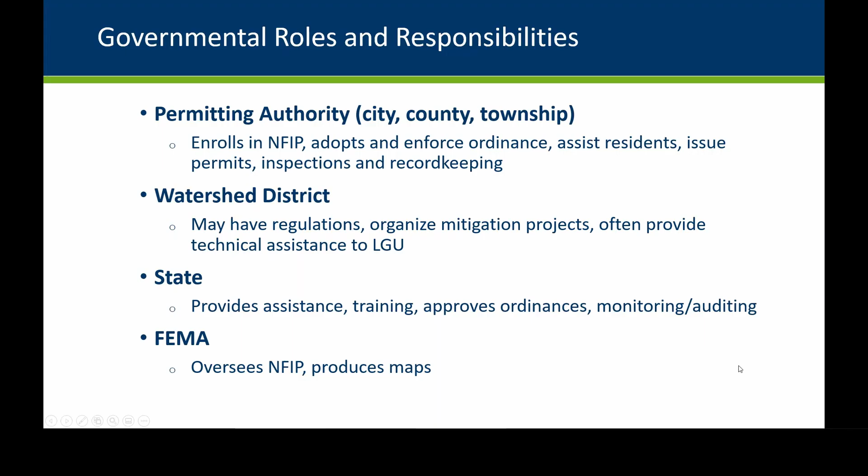Now, what types of development require a permit? Development is what requires a permit. Development is defined in your ordinance, and it's defined broadly. It's structures, it's earth moving, fences, roadways, culverts, bridges—really anything that's moving dirt in the floodplain, by and large.

I also put on there additions as well as restorations and repairs. These are kind of different because they involve alterations to existing non-conforming structures. Additions are limited in floodplain areas. Non-conforming structures are allowed to expand. There's limitations on that expansion, and the rationale behind that is we want to limit exposure to risk within our floodplain areas.

Damages as well. When a flood event comes through, there's a huge permitting demand on that local zoning administrator.

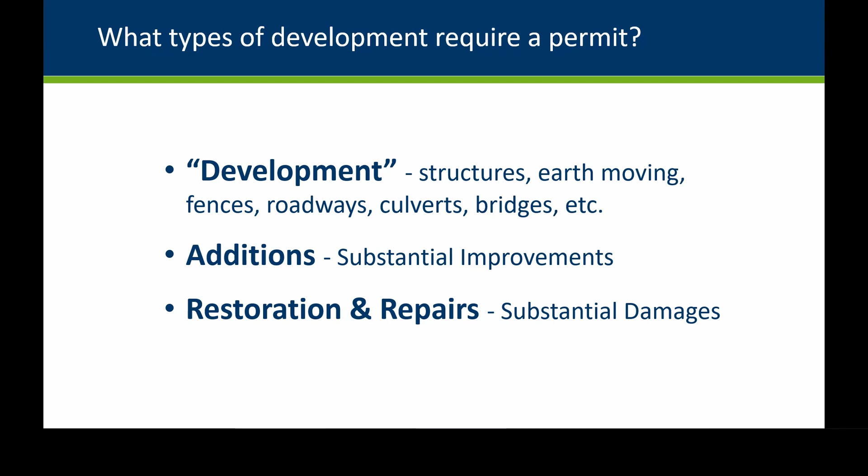When a structure is considered substantially damaged, that's when the damage exceeds 50% of the structure's value, and the property owner is required to bring that structure into compliance. There's a standard evaluation methodology we recommend zoning administrators use during that post-disaster period to determine that 50% category. Those last two bullets are a big part of permitting, which is why I'm including them here.

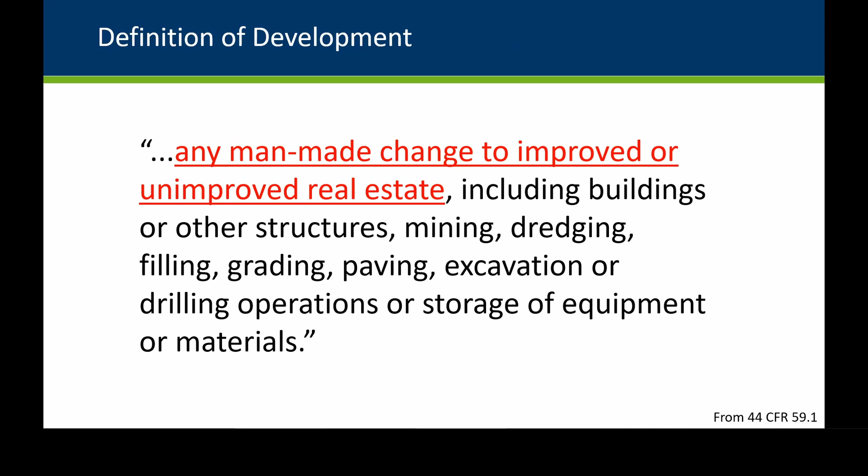Back to that definition of development, here's a portion of that definition on the screen now. As I said, it's defined very broadly as any man-made change to improved or unimproved real estate, including buildings, structures, mining, dredging, filling, grading, paving, excavation, drilling operations, or storage of equipment or materials. It's very all-encompassing - dirt moving, bridges, culverts, roads, shoreline stabilization. These are all types of development, and they all require a permit and at least some level of analysis.

What type of permit is required? You might have a building permit, and you can roll the applicable floodplain regulations into your normal building permit process. You might have a separate land alterations permit if the person is just moving dirt. You might choose to adopt a specific floodplain permit, so when development is in the floodplain, that triggers a floodplain permit. Really, we don't care what type of permit it is - it just requires a permit.

Our typical development happens near water. When a project is solely or partially below the ordinary high water level, that falls under the DNR's jurisdiction, so a DNR permit would typically be required - like for a culvert or a bridge. However, if a significant portion of that same project is above the ordinary high water level, a local permit would also be required, because it might trigger evaluation of other parts of your floodplain ordinance, or sections of your shoreland ordinance or other ordinances you may have as well.

A lot of the activities that require a permit might seem insignificant and wouldn't otherwise trigger a permit for you. That's okay - you don't want to make it too burdensome where it's too big of a deal to obtain that permit. When you're talking about fee schedules, maybe that's an annual thing for your community, and maybe it's appropriate to consider waiving fees for development that wouldn't otherwise require a permit.

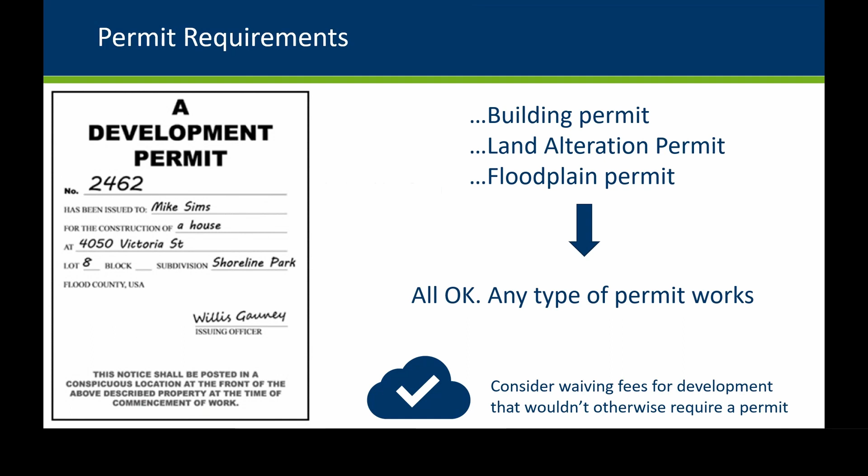On our website, we have a sample permit application form, and there are two versions of this form: a full version, which is a 5-pager, and a simplified version when development does not involve a structure, which is a 3-pager. It details the relevant standards you'd typically be confronting in a floodplain development. If you follow this document, it'll ensure you're hitting 80 or 90% of the items you need to be looking at for processing a permit. I'll get more into this document later in the presentation.

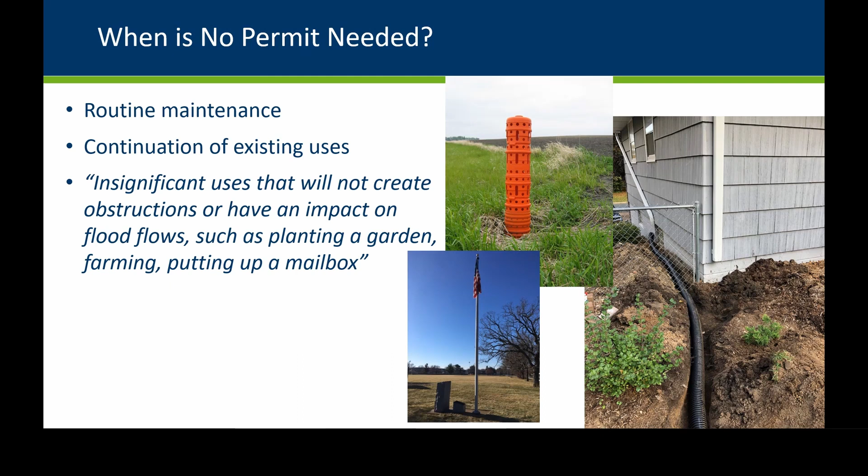When is no permit needed? This has been further clarified in the newest model ordinance we've put out. It talks about routine maintenance and continuation of existing uses that had gotten a permit a while ago. FEMA also details when a permit isn't needed, talking about insignificant uses that won't create obstructions or impact flood flows, such as planting a garden, farming, or putting up a mailbox. So it kind of leaves it up to the zoning administrator what you're going to consider an insignificant use, but it offers those examples. When in doubt, it should be permitted, to ensure that any activities with the potential to impact the floodplain are being permitted.

Here's another example of when a permit might not be needed. Our ordinances detail provisions for RVs. Travel-ready RVs can be stored in the floodplain as long as they're on wheels, highway ready, with those quick disconnects. But it's also something we want to keep an eye on, monitoring in that floodplain. Monitoring is part of zoning administration in the floodplain, and RVs have a tendency to establish permanence - those wheels can sometimes disappear, and folks can have attached decks like what we see in this picture. So it's something to watch in floodplain areas, because when these do get flooded, they have a tendency to get destroyed completely. These are people's homes, and we want to ensure they're dry.

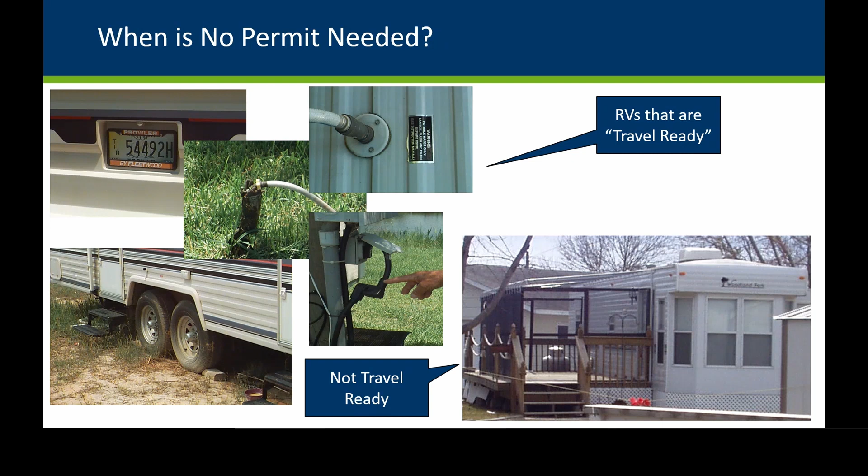A typical building permit process.

The structure of this presentation: we're going to guide us through a typical permitting process, and we're going to use a building as an example. A typical process is, a person would come into our office and they would want to develop a property, and we want to guide them through the process.

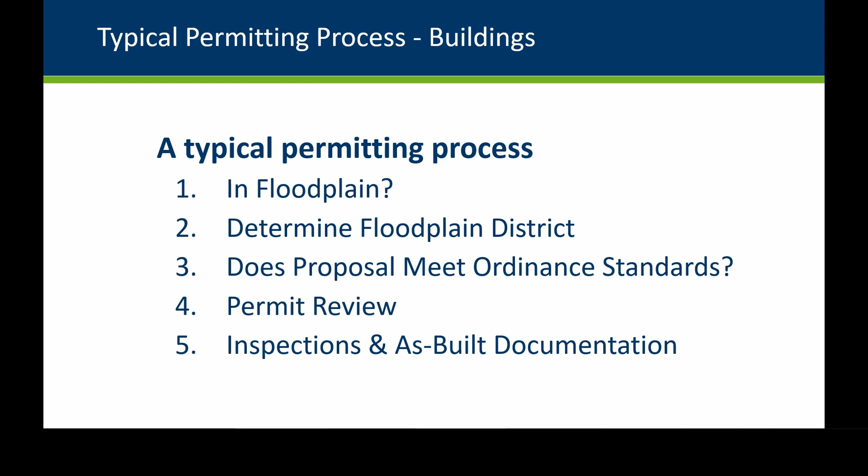Are they in the floodplain? Once we determine that they're in the floodplain, we want to verify what floodplain district they're in. We want to dig into our ordinance and ensure that the project's meeting ordinance standards. And then we work through the permit application process. We review that permit and we issue that permit, and our work isn't done there. Floodplain also involves inspections, and it requires documentation. So we're going to dig into each of these 5 steps in greater detail as we go along.

Like I said, so are they in the floodplain? A resident has come into City Hall and they've inquired about building down by the lake or the river. Our first step is just to figure out where it is and whether our floodplain ordinance applies. So we need to know our maps and how to find them. And this is going to be different in every community.

The site here, our Find Flood Map site, contains a few different tutorials for viewing and downloading maps. On this page, you can click on that expandable map. It gets a little bigger. You can see the different types of flood maps in each county. Some counties and communities were mapped in the early parts of the National Flood Insurance Program in the 70s, 80s, and even 90s.

A lot of those maps were done, I don't want to say crudely, but they were printed on paper. You don't see them over an aerial photo background. You have to get out your ruler and scale it out. Contrast that to flood maps that are done more recently. They're done digitally. You can access them online through FEMA's Map Service Center site. You can see it over an aerial photo background. The floodplains clearly follow contour lines, and they're just a little bit more accurate.

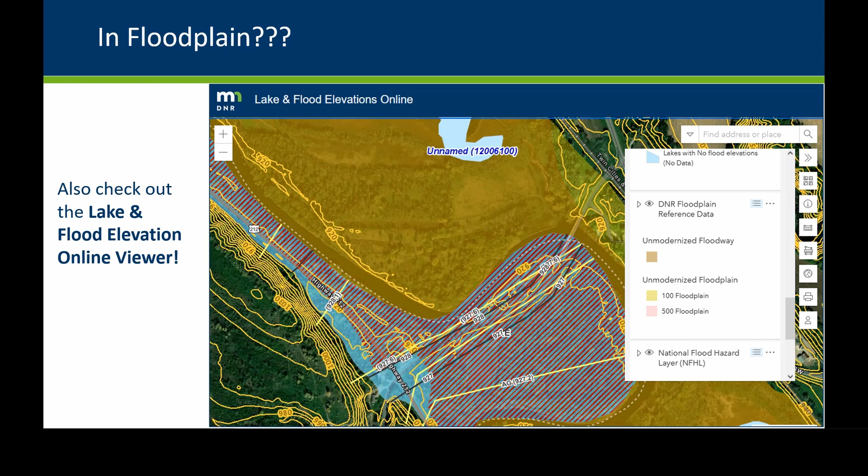There might be a couple of counties where it's not digitized, but at one point we've taken those old paper maps and digitized them so you can view them over an aerial photo background. And that's what's so great about this Lake and Flood Elevations Online, is that it brings all of those different sources together. If I was giving this presentation just like 3 years ago before this came out, I would have been talking about the different places you can go to find all of these different things. And I think it was kind of confusing to a lot of folks. Long story short, if you haven't familiarized yourself with this site, I would encourage you to do so.

So now that we've found our map, we want to evaluate its accuracy. And there's a lot of situations where the floodplain is mapped poorly. It might be an A zone that was mapped without any kind of detailed modeling, like A zones have a tendency to be, or it was mapped before we had LiDAR flown, so before we had an accurate representation of those contour lines. Lots of times the maps, when they were originally delineated, used 10-foot USGS contour maps, so it was very difficult to get very good delineations using those old 10-foot contours. And that was the best data we had. You should make a point to learn your maps and compare them to the contour elevations well enough to know whether your floodplain boundaries accurately align with those true ground contours.

So a couple of examples here. We see on our screen this mapped floodplain, which clearly doesn't follow contours. And we have a property owner that wants to develop in this site right here. It's outside the floodplain, but you can clearly see that it's low. If this was mapped today, this probably would have been mapped in. It's obviously an at-risk site. Alternatively, we have this site here, which is on a ridge, but it's been incorrectly mapped in.

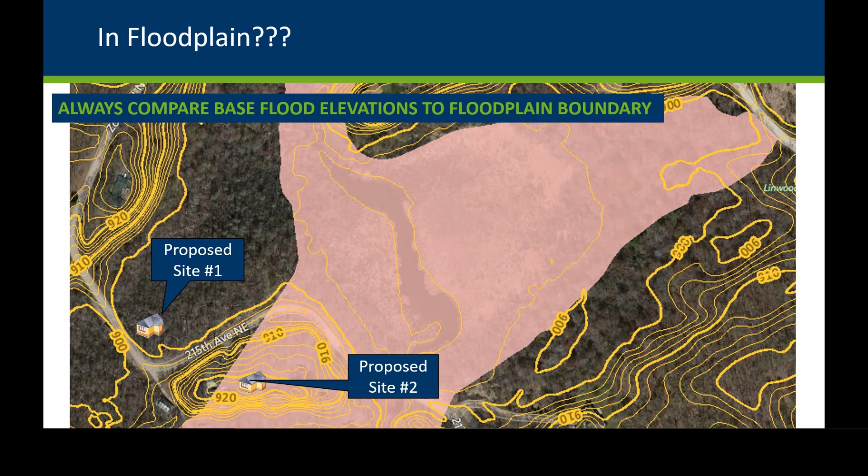And really, both of these sites, we have the ability to apply our floodplain ordinance to them, and we should be. The reason is because we have a rule provision that accommodates this type of poor mapping, and it says where a conflict exists between the floodplain limits illustrated on the official zoning map and the actual field conditions, the flood elevation shall be the governing factor in locating the regulatory floodplain limit. That's been incorporated into our model ordinance for as long as the floodplain management program has been around in Minnesota. So you have a provision like this in your ordinance too. And that gives you the tools to apply your ordinance in those areas that might be just outside the mapped floodplain areas, but which should actually be mapped in.

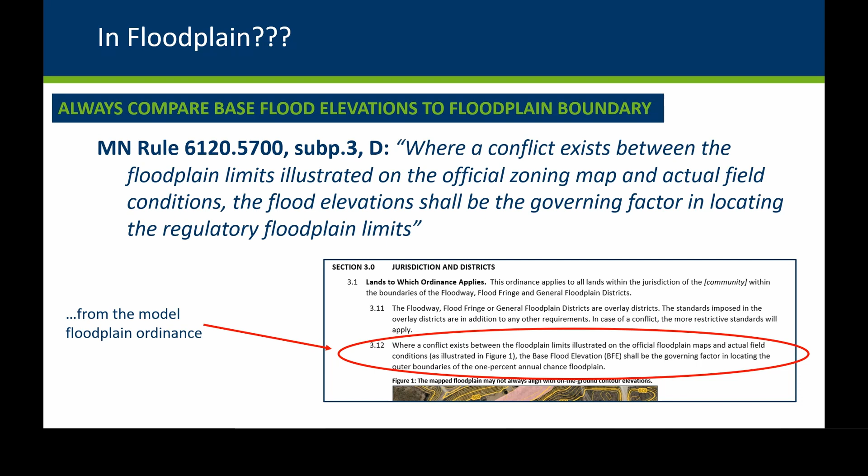So let's do the same type of evaluation on another site. This is another A zone, with no floodway delineated, no flood elevations. We've looked on our official flood map, and this is what it looks like. We don't see a floodway, we don't see flood elevations. There's no contours or nothing. But we get a property owner that wants to build in or next to that A zone. Now, we can't issue a permit until we verify the boundaries of the floodplain, and we must stay out of the floodplain entirely until that's done. And that's a good thing because there's a certain level of unknown risk around these A zone areas.

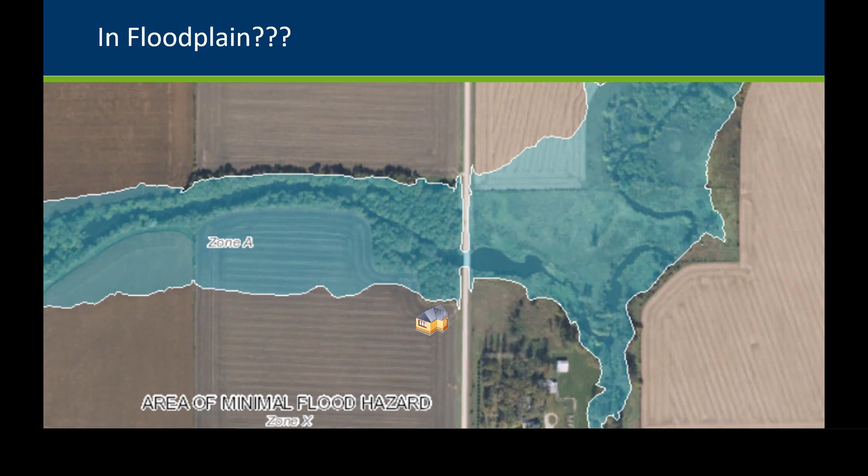So a typical process, if I was a zoning administrator confronting this property owner: number one, are they in the floodplain? To determine that, we need to know the base flood elevations. This happens to be a site where we have our pink line data set. Though we didn't see flood elevations on our official FEMA floodplain map, we can open Lake and Flood Elevations Online and see our pink lines. So here's a site, and we can see that it's between BFE cross sections of 1310.5 and 1310.2. We're going to call our base flood elevation the upstream cross section, 1310.5, and compare that to the contours.

In our location, it's looking like the floodplain pretty closely follows the contours here. So this is a location where the floodplain is delineated pretty accurately. That's a good thing. We're comparing our base flood elevation to the contours. They match up. So they can build outside of what's mapped, and they're outside the floodplain. The floodplain ordinance doesn't apply. If we can convince these property owners to stay outside the floodplain, it's going to be a much simpler permitting process. They're reducing risk. It's a good thing. Everybody's happy. It doesn't always work out that way.

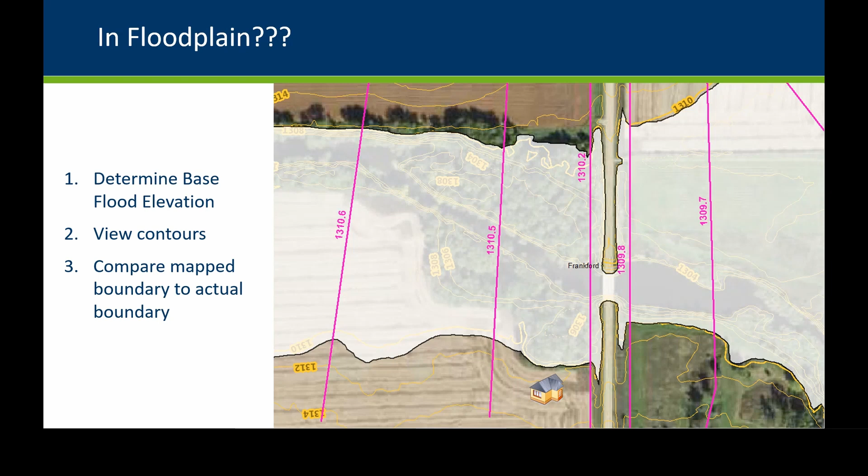Folks like building as close to that water as possible. And in this situation, it might be in the shoreland district. So if we have a shoreland ordinance in our community, that shoreland ordinance, if we look at the image on our right, along rivers and streams, extends 300 feet landward of the ordinary high water level. In this situation, the floodplain is narrower than that 300 feet, so the shoreland might extend outside that mapped floodplain.

Minimum elevations still apply throughout the shoreland area, even when the floodplain is shown to be a little bit narrower. Shoreland minimum elevations apply in unmapped areas entirely, and like I said, in those situations where the floodplain is narrow. So the graphic on the left is kind of a depiction of what we just saw. You might be on the shore side, clearly in the floodplain, and that's representative of the house on the right. Clearly in the floodplain, regulations apply, minimum elevations apply. They have to elevate that lowest floor above the RFPE.

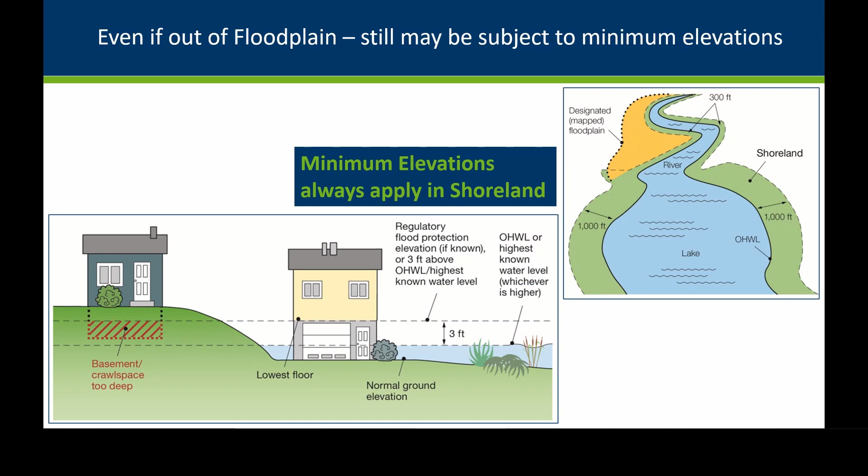The house on the left is outside the floodplain, but still within shoreland. Minimum floor elevations still apply for this house as well. If they want to dig a basement, they can't dig that basement below the RFPE. The great thing about this standard is that when water bodies are mapped by FEMA at some point down the road, this standard ensures that our structures are built high and dry above that 100-year flood elevation. This ensures that our building stock is protected. It eliminates the requirement for residents to carry a flood insurance policy when they're later mapped into the floodplain. This has been a very good and successful standard for Minnesota.

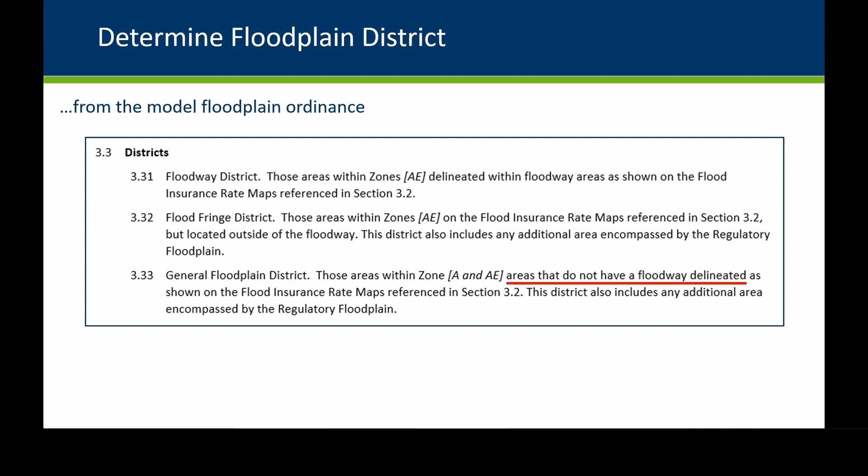So we verified that our site is in the floodplain, and next we have to determine the floodplain district. Your ordinance should be set up in a way where it details these different districts. We have a floodway district, a flood fringe district, and a general floodplain district. If your community has A zones or areas that do not have a floodway delineated, you have a general floodplain district in your ordinance. So we're determining what district our site is in. If we're in a detailed study area where the floodway and flood fringe are clearly delineated on a map, this is typically easy.

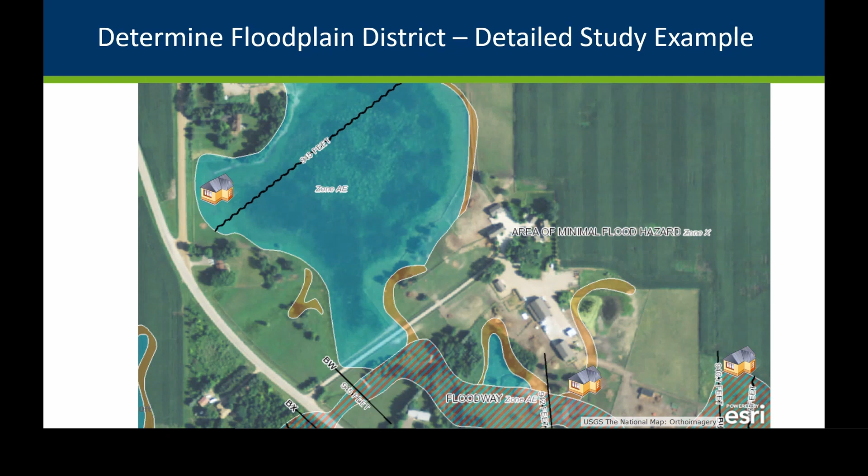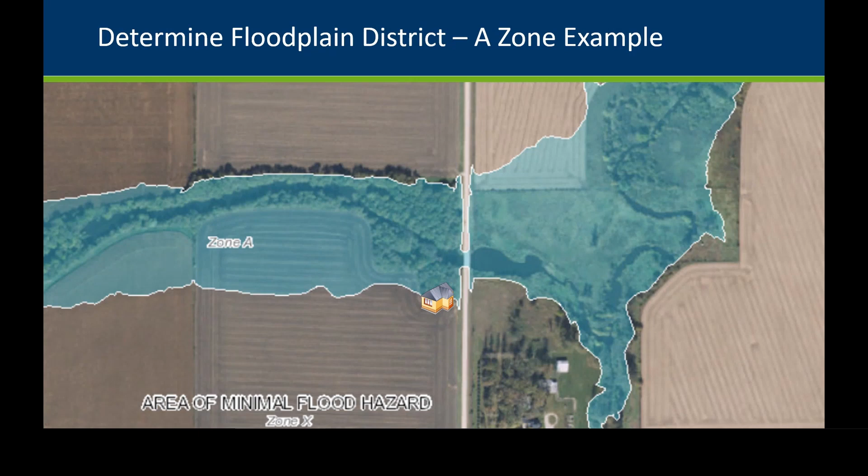Let's do another example. Let's go back to the same site, and let's say the same person doesn't want to stay out of the floodplain, and we can't convince them otherwise. They want to build as close to that stream as possible, and shoreland setback requirements allow them to do just that. Our ordinance allows them to build within the floodplain if this is an A zone, but a process must be followed. Since this is an A zone, the floodway is not delineated. This is within the general floodplain district. In order for them to build there, we have to verify that they are going to be outside of the floodway.

Your ordinance should detail a process for that. In our most recent model ordinance, this is contained in sections 7.2 and 7.3. Those on the call probably have an ordinance that's based off an older version of our model ordinance. This could be clear.

But by and large, what your ordinance says is something very similar to what's on my screen here. And that involves determining an elevation. That is always required when you're in an A zone of some sort. Again, that's not going to be on map service center, but if you're in an area with those pink lines, that might be available through our lake and flood elevations online.

You have to do an encroachment analysis. Since this is an A zone, a no rise requirement doesn't apply. In A zones, you're actually allowed some level of rise, no more than a half a foot, as long as no other flood damages would result.

Increased flood damages, our interpretation of that is you can't cause any rise if it's going to flood out a neighboring house. So though your ordinance allows a half a foot of rise, it's important to look at what other houses around there might be affected by it. So you might be limited further, so that would limit your ability to bring in fill, for instance.

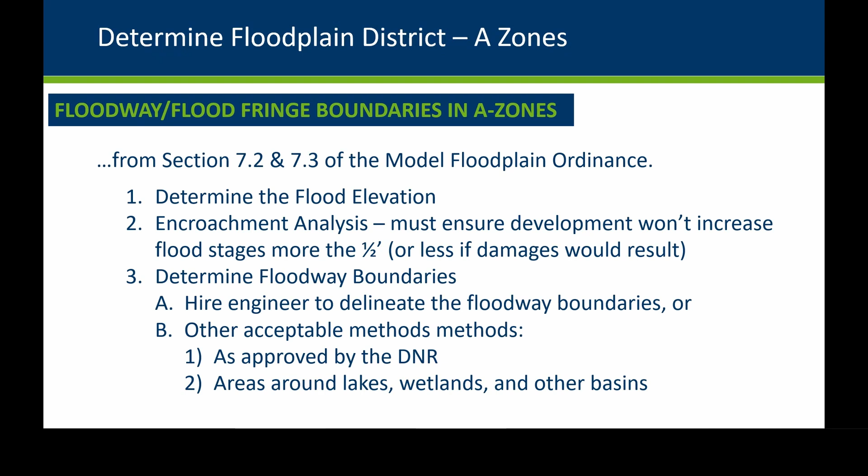Then our rules accommodate for other acceptable methods, and those other acceptable methods have to be approved by the DNR. Some of those are written into an ordinance, which I'll get into. There might be some straightforward scenarios where the DNR can take a look at the hydraulics and simply draw a floodway line for the local community.

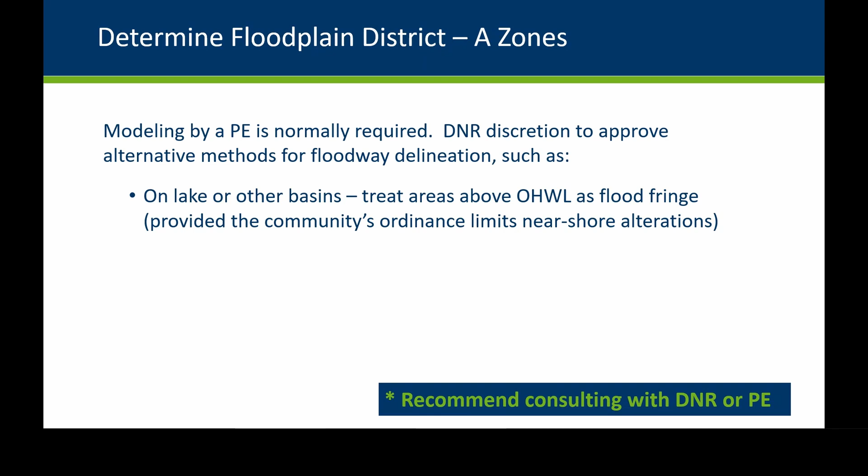Around lakes, we have language that allows all lands above the ordinary high water level to be treated as flood fringe, so long as disturbances in that nearshore area are minimized. Now, if you're right next to an inlet or an outlet, it might require further analysis.

There's also those backwater situations where we don't have velocities and flows. We could draw a floodway line in those situations to clearly show that it's outside the floodway. Situations where it's upstream or downstream of a bridge, the hydraulics in these locations is very predictable and can help guide those floodway boundaries.

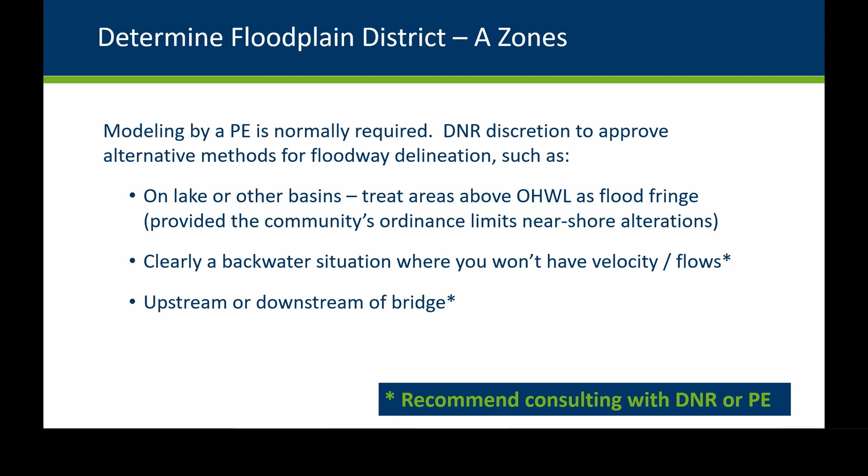I think next Monday, Ceil has a special training on A zones, the 13th. So if you're a community with a lot of A zones, I would encourage you to attend that presentation, and she'll dig more into these concepts at that presentation.

So we verified the sites in the floodplain. We verified what district it's in. Now we need to dig into our ordinance and make sure that it meets our ordinance standards. So our ordinance guides uses. The ordinance will talk about permitted uses and conditional uses. The floodway is very restrictive in the types of uses that are allowed in the floodway.

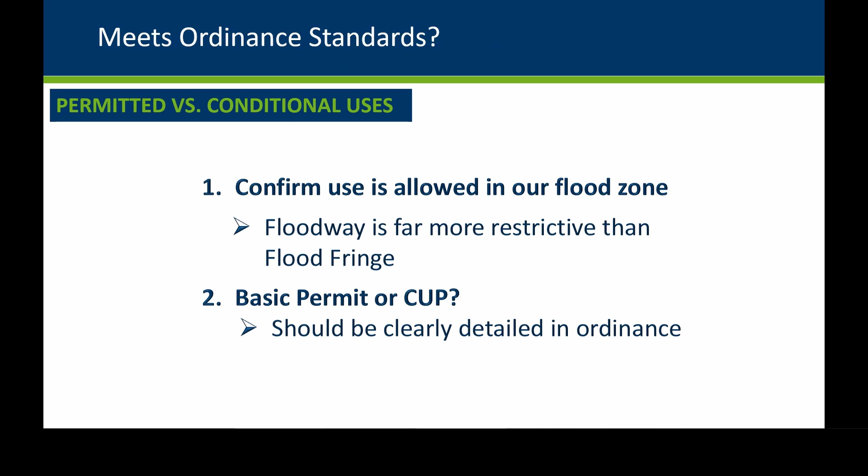If we're in the floodway, only so many things are allowed there. Flood fringe, broadly, anything is allowed, more or less, with some exceptions there. Then once we determine that it's allowed, is it a basic permit or does it require a CUP? And these things are pretty clearly detailed in your ordinance.

There's requirements that apply to all development. All development must be anchored. You must use flood resistant materials. There must be adequate drainage, not detrimental to adjoining areas. You don't want to flood out your neighbors. Utilities must be above or flood proof to the RFPE.

There's also a provision for storage of materials. Nothing that's flammable, explosive, injurious, or likely to cause pollution. That provision, that last bullet's been written slightly different than the most recent version of our model to more closely mirror what's in rule, as well as accommodate for those types of projects that would require PCA permitting. So it accommodates for exceptions provided they meet the requirements established by Pollution Control Agency.

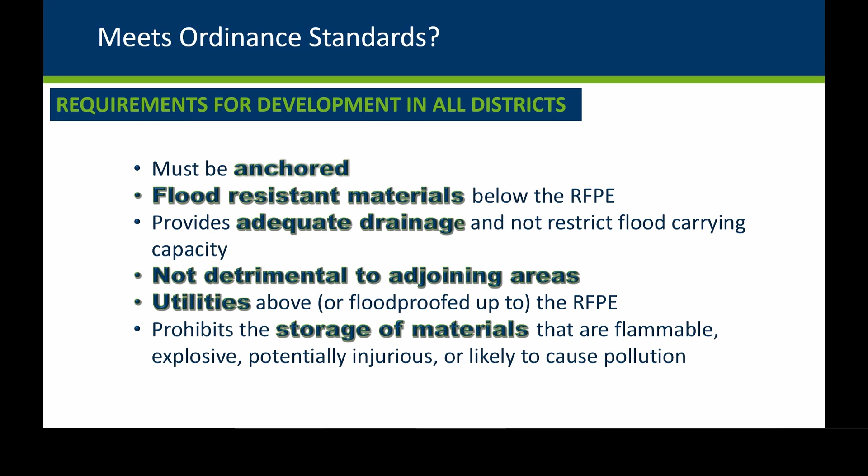But we're building a house. And there's two methods to build a house in the flood fringe. You can elevate on fill, and that's a basic permit. And there's alternatives to fill. Anything that doesn't meet the fill standards requires a CUP.

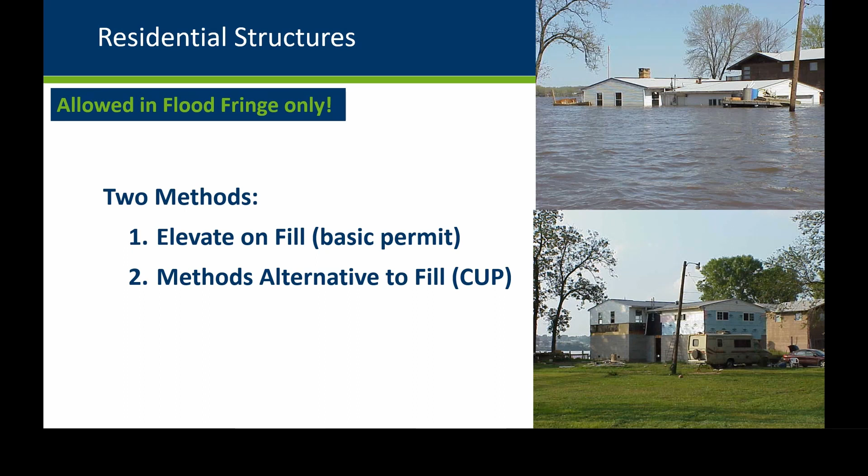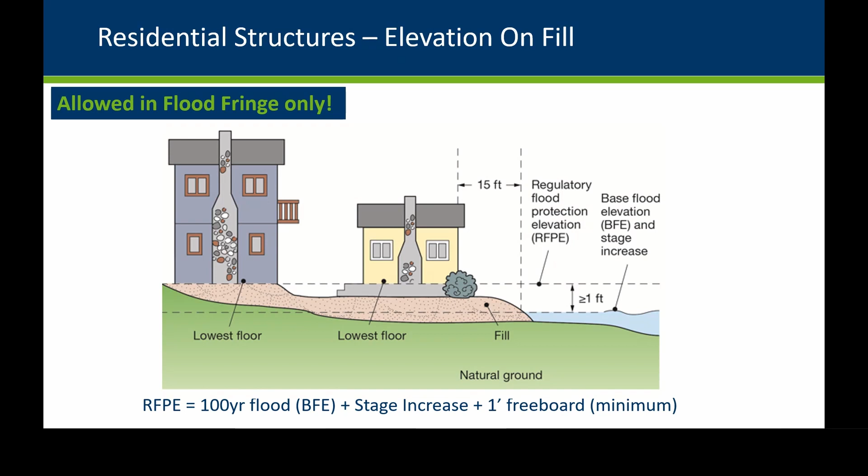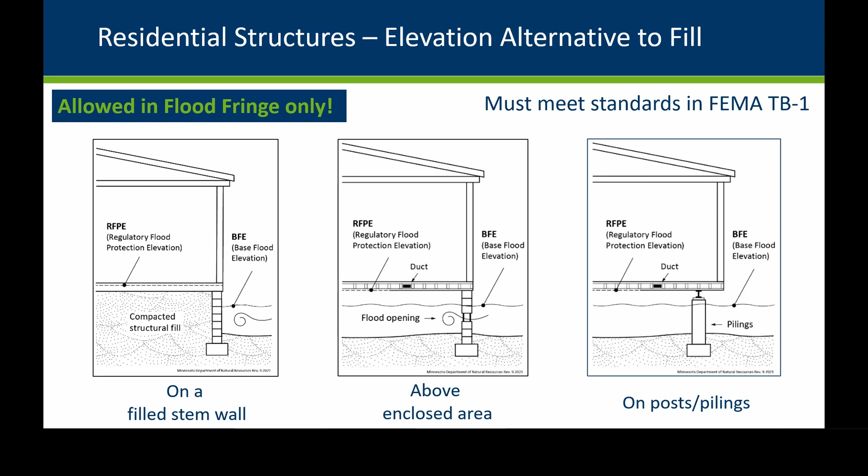Let's like the example I talked about—say you have a narrow lot and you can't extend your fill 15 feet. This is a very reasonable alternative. Or say you have a situation where the natural ground is well below RFPE, and the amount of fill you would need to bring in is extremely cost prohibitive. This might make the options in the center and right side of the screen a little bit more appealing.

Definition of lowest floor, just real quick: the lowest floor is the lowest enclosed area, including basement. Your definition will have a second sentence that relates strictly to those alternative elevation methods, and that creates an exception to that first sentence. It's basically saying if you have flood vents and you're utilizing those alternative building elevations, the lowest floor would not be that lowest enclosed area.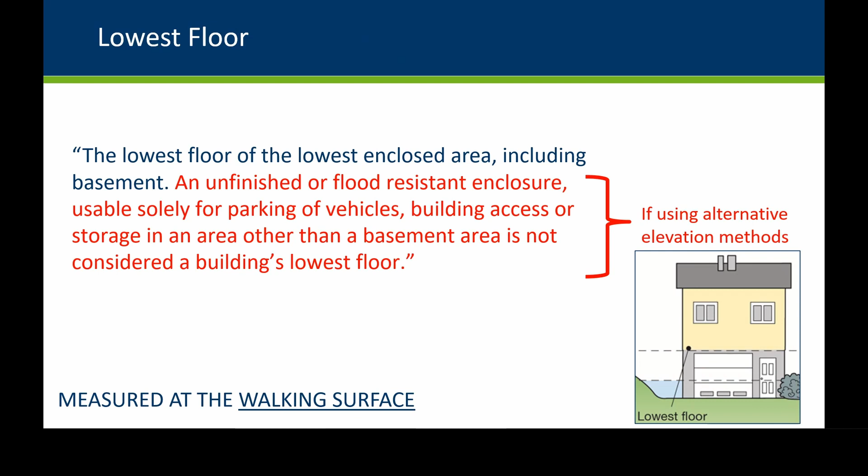So we talked about primary structures. These are accessory structures, and real quick—there's 2 primary methods to develop an accessory structure.

The first, and most common, is through wet flood proofing. That enables the accessory structure to be inundated. You've installed flood vents, and you're accommodating for that structure to be inundated during a flood event. When you build that way, you're only limited to structures that are less than 576 square feet—that's the size of a 2-car garage. Within those areas, they can only be used for parking and storage.

You can build a larger accessory structure on fill, but if you're going to utilize those wet flood proofing methods, the only way to do it would be through a variance—think about a large ag structure, for instance. Using the amount of fill to get a large ag structure above the RFPE might not be possible. So that might be a type of situation where we see a variance allowing wet flood proofing, but for a larger structure. Those would be one of the few situations that we would ever see a variance in floodplain.

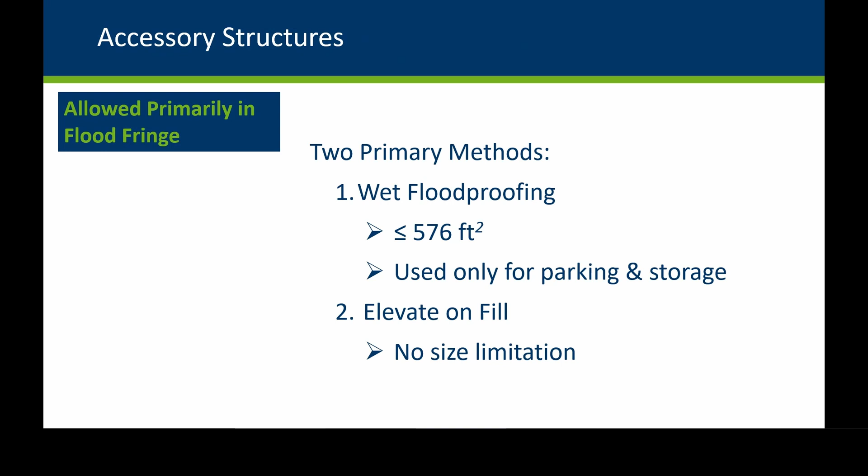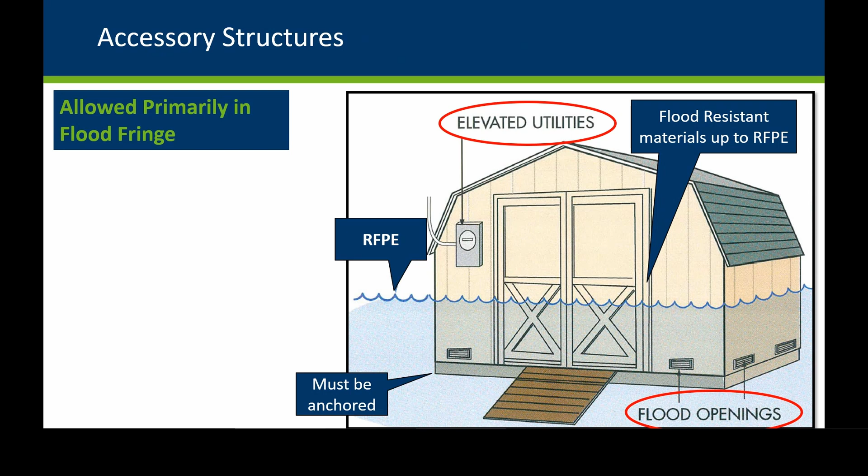Visually, this is a wet flood proofed accessory structure. We can see that we have our flood openings. We have elevated utilities above the RFPE. They meet the standards that apply to every other type of development in the floodplain—it must be anchored, it must have flood resistant materials, that sort of thing.

Accessory structures are challenging for zoning administrators. A lot of these have a tendency to get built without a permit.

There's good reason for that. They have a tendency to get washed away during a flood event or plug up culverts downstream. I understand that these are all over the state, but they're just not permittable.

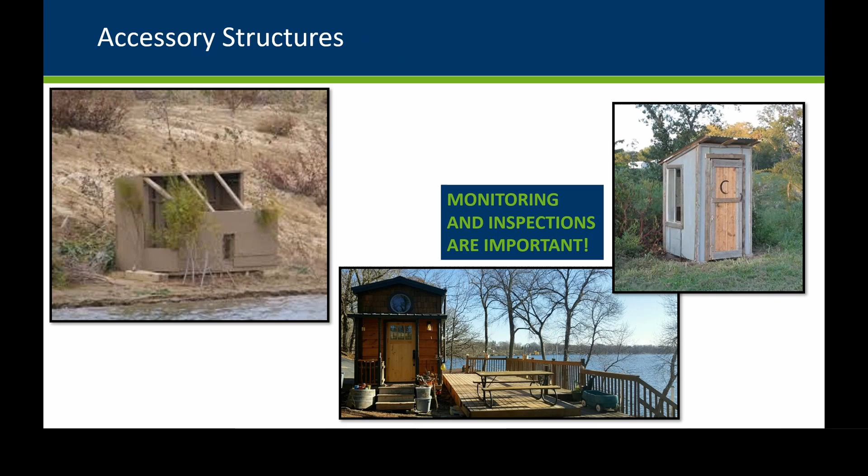On the right, an outhouse. Our floodplain ordinances have standards for sewage treatment systems and other service facilities. We don't want these in floodplain. They're tough, tough to permit. You might not have a permit process for them, but when it's floodplain, they just need to be scrutinized more.

So we've done all of our analysis, and now it's time to issue our permit. This gives us an opportunity to communicate with a property owner. It's important to communicate flood risk and alternatives with the property owner, as well as implications for flood insurance.

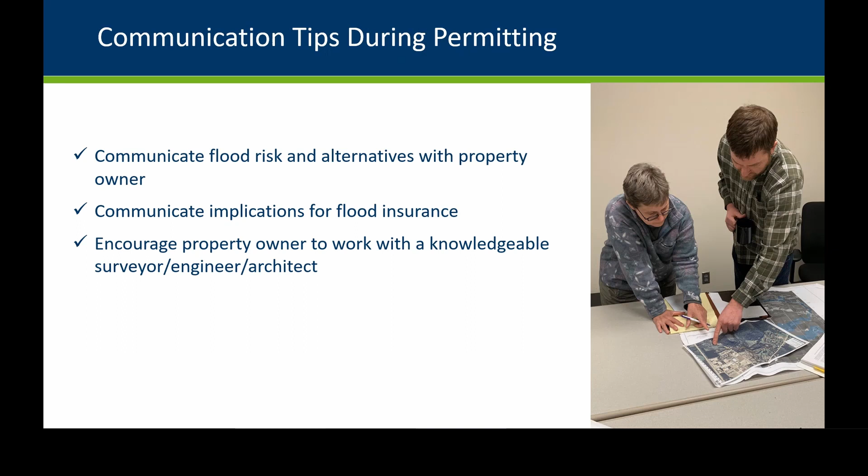This is our chance to steer the property owner to different local contacts, a surveyor, engineer, or architect we might have experience with, that can help guide a property owner through that process. If you're utilizing our floodplain permit application form, you can help complete that permit application form together. This is also where you want to encourage the completion of an elevation certificate, a formal FEMA elevation certificate.

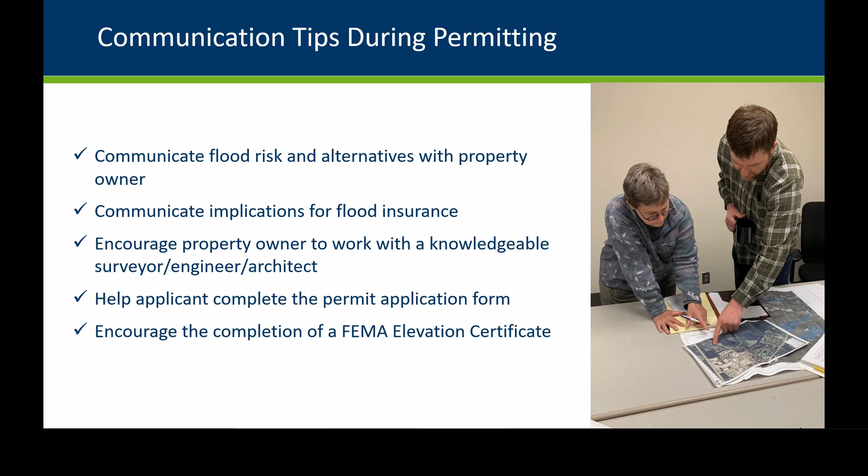There's reasons for that, and I'm going to get into that later. But that's one form of an as-built that we really should start thinking about more and more.

Our permit application form, let's dig into this a little bit. This is, I believe, from the 3rd page of our 5-pager, our full permit application form. The first 2 pages are filled out by the applicant, and then this 3rd page is filled out by the floodplain administrator.

This top section is where we detail our flood zone and our RFPE determination. We verified the district that they're in. Is it a permitted use? Is it a CUP? And then we identify our base flood elevation and our stage increase that we found from the flood insurance study or otherwise.

We identify the freeboard that's in our ordinance to come up with our RFPE, and in this case, it's 1092.3. We've identified the datum that it's in, as well as the source of where we found that BFE.

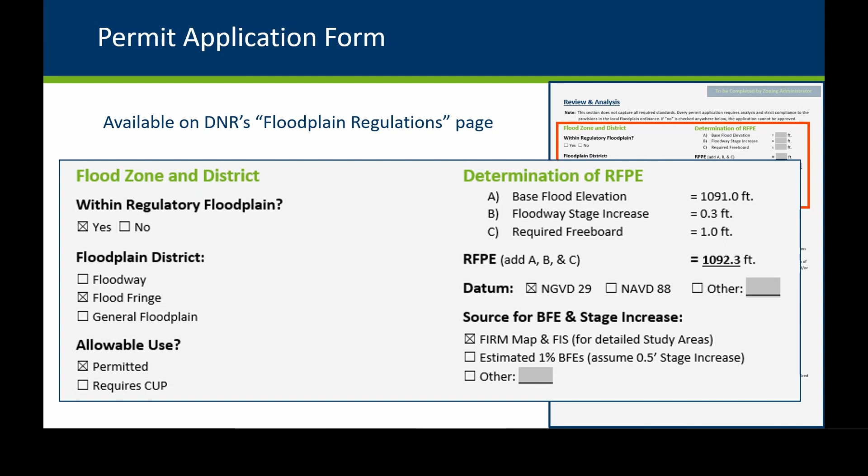The bottom section is for when we have building construction. This is where we're identifying the required elevation for the structure and what is required, such as the top of the bottom floor, including basements or crawl space.

The top of the next highest floor would be applicable if we're utilizing those alternative elevation methods. Elevation of an attached garage, if we have one. We identify the lowest elevation of the electrical, gas, ductwork, lowest adjacent grade, and fill elevation 15 feet from building.

This communicates to the property owner that these elevations are required. When this is complete, the property owner knows exactly what elevations they have to meet, and it's documentation for the file.

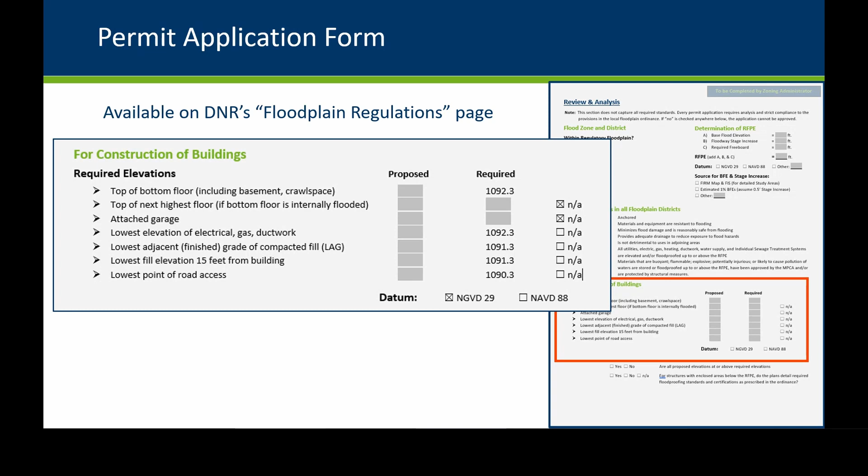I think it's the 4th page that details relevant requirements for non-conforming structures. So if it's an alteration of an existing structure, it requires us to do some evaluations, documenting costs of the improvements or repair. We have to identify a number.

We also compare that number to the market value of the structure, and we have to determine what that market value is. We have a recommended process for doing that, detailed further along in this presentation. But we have to compare the two, cost of the project to market value, and ensure it's less than 50% of the market value. So whether it's an improvement or repair, those costs can't be more than 50% of the market value, and if it is, then they have to bring that structure into compliance.

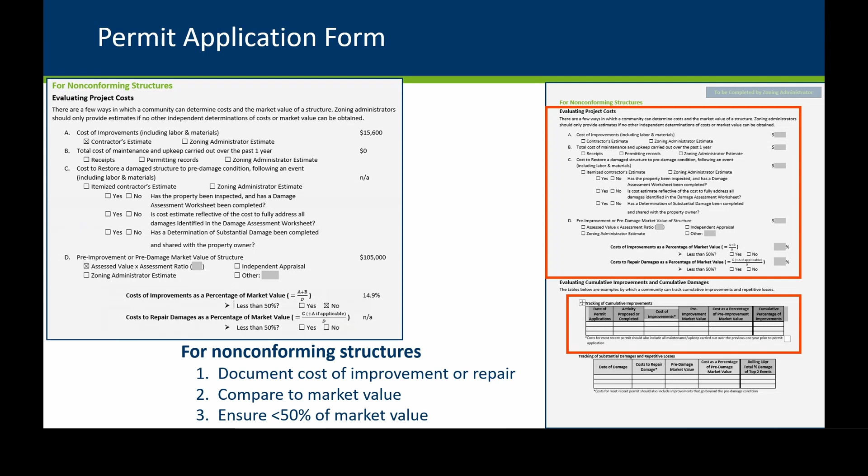If you're identifying all these numbers in the permit application form, this is your documentation. You can throw it in the file, have it there for the next time somebody applies for work on this structure. That's important because a lot of folks have a provision in their ordinance for tracking alterations cumulatively over the life of the structure.

This offers a little bit of guidance for how you might track those improvements or damages cumulatively. Let's say in 2004, they had a new deck, and we did an evaluation and found that that deck improvement was 10% of the market value of the structure. Then in 2016, they did an addition, and that addition alone was 32% of the market value of the structure. But our ordinance requires cumulative evaluation, so we look at past deck improvements along with this, and they're still under that 50% threshold. They're at 42 now.

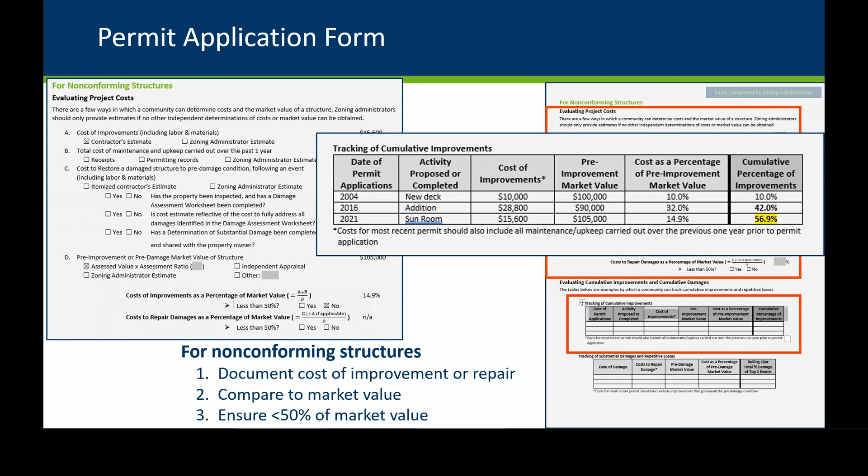So at this point, they're pretty limited in what more they can do with that structure beyond just basic maintenance. Then 2021 comes along and they want to add a sunroom. Well, they can't do that, because what they're proposing would then bring them over that 50% threshold if the community has adopted a cumulative non-conforming structure provision in their floodplain. And this permit application would guide them through that.

We have a document on our website, Minnesota Post-Flood Substantial Damage Playbook for local officials. This gets into how a zoning administrator would evaluate those costs with a little bit more detail, and how to determine project costs. You want that property owner to obtain a cost estimate from a contractor - that's the easiest way. And then market value of the structure.

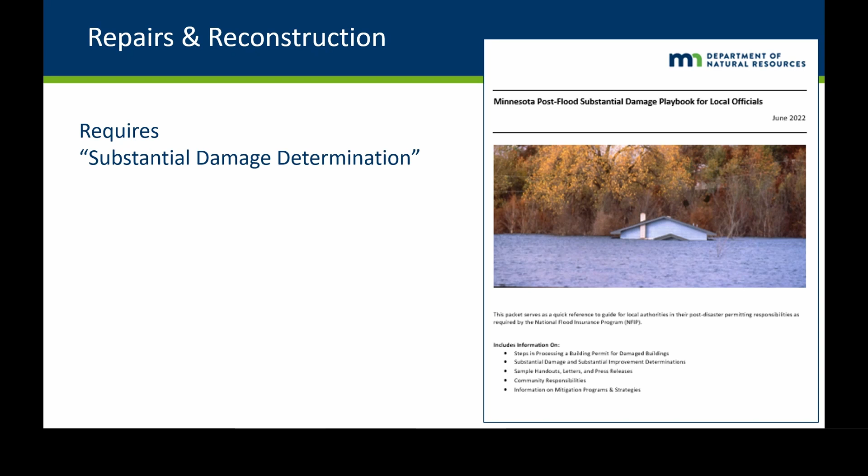Your assessor will probably have an assessment ratio, so you have an assessed value and then an assessment ratio, and your county assessor would have a recommendation for determining a market value of a structure. This document gets into that a little bit more.

And if it's a repair, just be prepared. If you have a flood event, you're going to get inundated with permitting demands. People want to fix their houses and fix their houses immediately. If you're a zoning administrator in a floodplain area that has a tendency to flood, you want to establish a process. I would encourage you to think about that before your flood event ever comes.

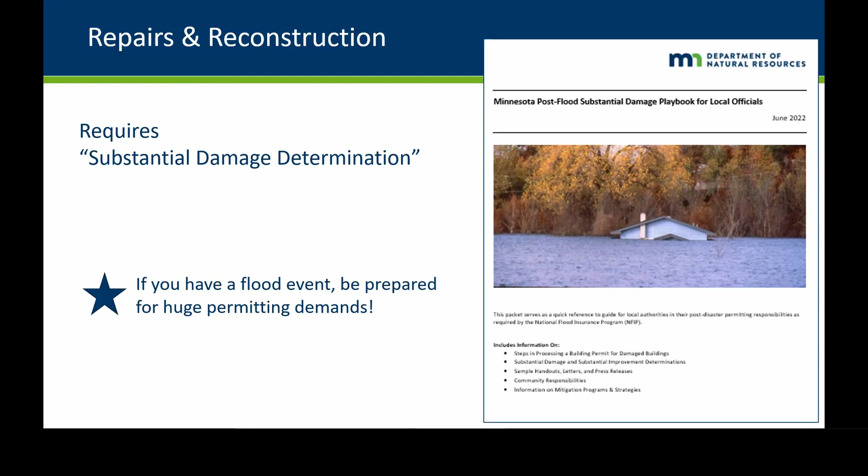So we've issued our permit. Now we have inspections and as-builts. Not everybody has inspections typically in their community, but if it's floodplain, it's required. So just know that. Inspections are strongly encouraged - it's easier to correct the compliance issues early on in the project.

What this would typically involve is an early site visit. You go on site, and typically what you would see is the surveyor has established a benchmark, usually identified on a post or some lath. You want to verify that they're using that benchmark to shoot their grades and base their lowest floor on, and all those other required elevations - you want to ensure that they have some kind of a benchmark on site where they're basing all of their elevations from.

You also want to ensure that what they're building is what you've permitted, that there's not any other kind of modifications that you haven't okayed. And then once everything is all complete, there's as-builts, and as-builts are required. If a surveyor is out there shooting grades for development, that property owner should also be working with that surveyor to complete a FEMA elevation certificate.

If they're getting a flood insurance policy, they're going to need a flood elevation certificate. If they need to get a letter of map amendment, they need to get a flood elevation certificate. And with risk rating 2.0, we can't recommend flood elevation certificates strongly enough. Most folks are getting better flood insurance rates if they have that FEMA elevation certificate. So also, while you're on site, you also want to be taking pictures, and those pictures can be used for the file for the future as well.

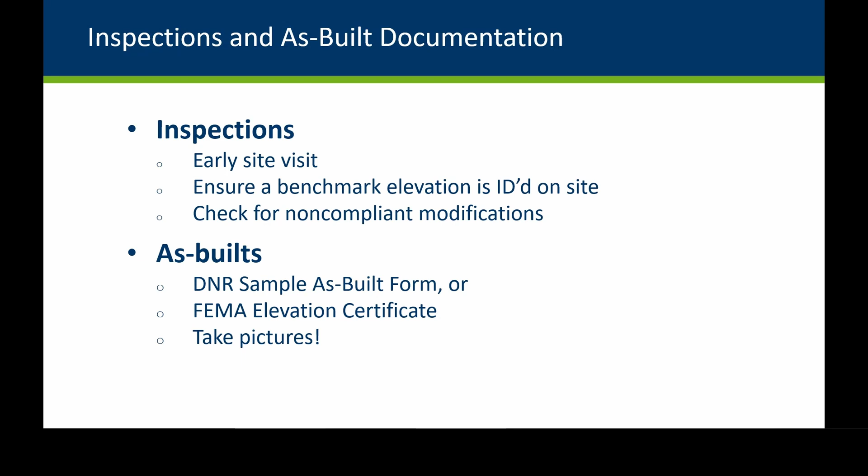I know I'm running out of time, but I just have a few more slides left.

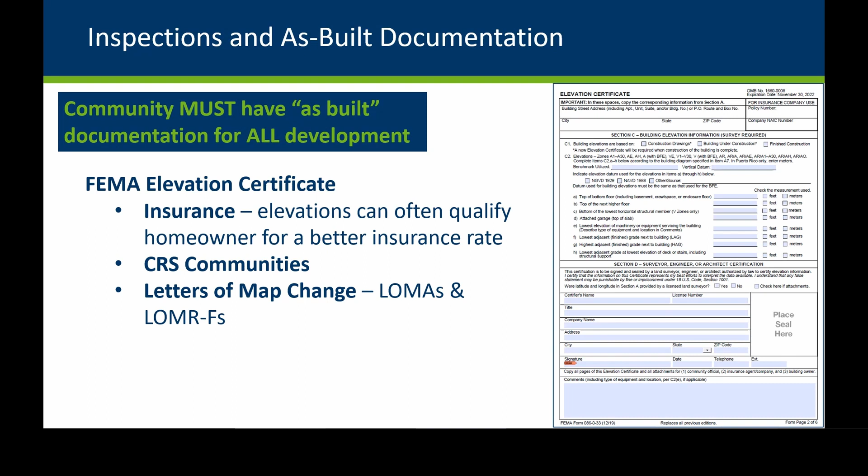Inspections and as-builts - here we are again with the FEMA elevation certificate. It's used for insurance. If you're a CRS community, which is a FEMA program that awards communities for higher standards, implementing administrative best practices, they can get residents a better rate on their insurance policy if they're a CRS community. CRS communities have to use FEMA elevation certificates for as-builts. Like I said, letters of map change, a FEMA elevation certificate is required too.

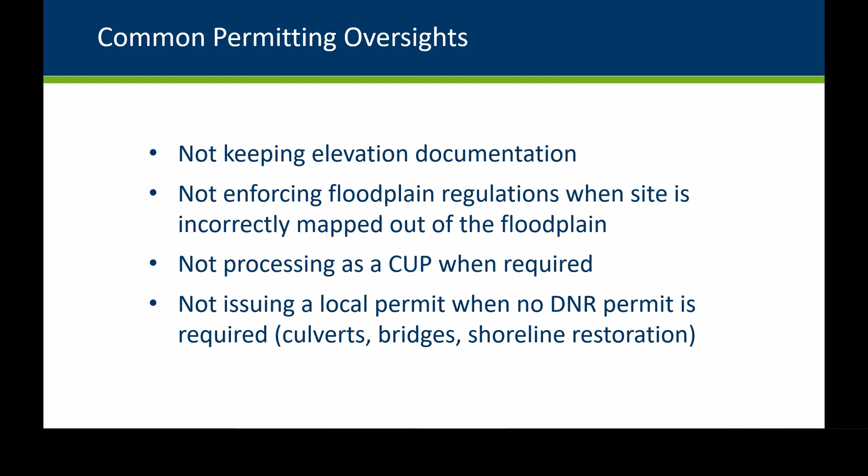Common permitting oversights: not keeping elevation documentation, not enforcing floodplain regulations when the site is incorrectly mapped out of the floodplain, not processing as a CUP when it's required, or not issuing a local permit in those situations where no DNR permit is required.

And the most common legal challenge is when permitted development later causes damage to others. Just know, if you're following the regulations, the law is on your side. So never feel bad about rejecting a permit application. Sometimes as zoning administrators we can get political pressure to accommodate development. Some communities are just desperate for development, but as long as you're following your ordinance, you have the reassurance that you're following the law.

And there's very few variance opportunities, so we want to ensure that we're adhering to the floodplain requirements.

A few other administrative considerations: floodway developments. Like I said, uses in the floodway are very restrictive. The only types of buildings allowed in the floodway are buildings accessory to certain types of uses, like a park shelter, or if you have aggregate mining you might need a very small structure or something like that. Very few exceptions for that requirement—by and large, no buildings in the floodway. And any grading, filling, or obstruction must demonstrate a no rise, 0.0 feet during a 100-year event.

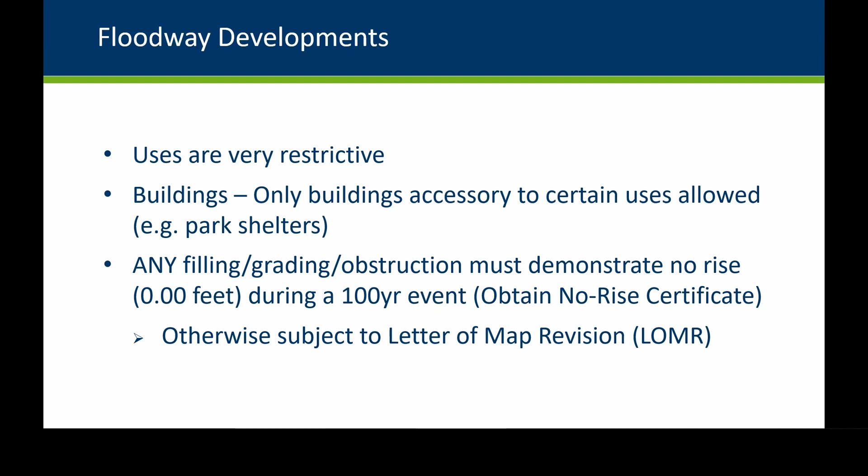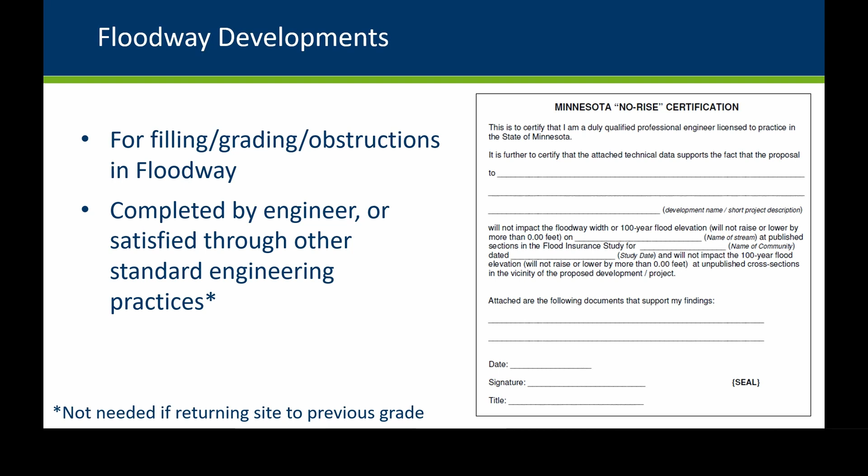So if you're moving dirt, you have to get a no rise certificate. And if you can't demonstrate no rise, you have to get an official FEMA map revision, a letter of map revision. How is no rise demonstrated? The developer has to engage an engineer, and the engineer has to complete a no-rise certification. Or our law also accommodates for standard engineering practices. So when there's earth moving activities in the floodway, but those activities are returning that soil to the grade that was there previously, that's really the only type of situation where a no-rise certification wouldn't be required.

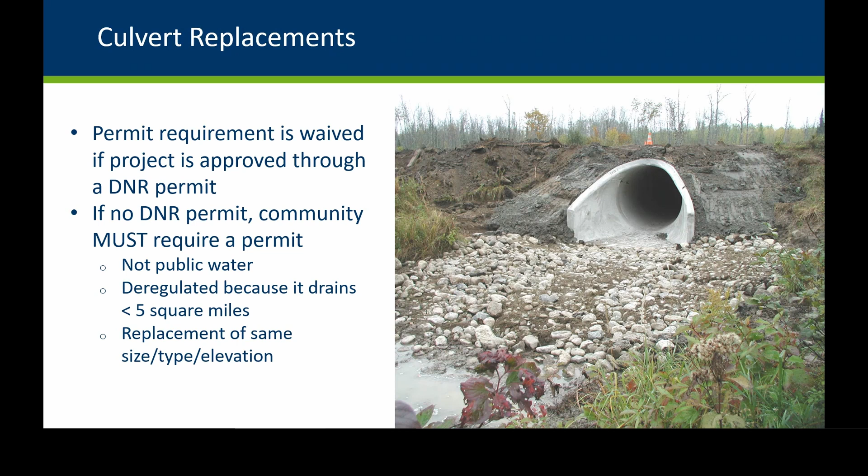Culvert replacement is one of our most common activities in the floodway. A local permit is waived when it's approved through a DNR permit. There are situations where no DNR permit is required, like if it's a mapped floodplain but not a public water—then a local permit is required. DNR has also deregulated public waters that drain less than 5 square miles; we aren't issuing DNR permits for those, but a local permit would still be required. There's also an allowance for replacement of like size, type, and elevation culverts—straight up culvert replacements. That's allowed, but it still requires a local permit. You can streamline those in any way you'd like to reduce the burden, but a local permit is required nonetheless.

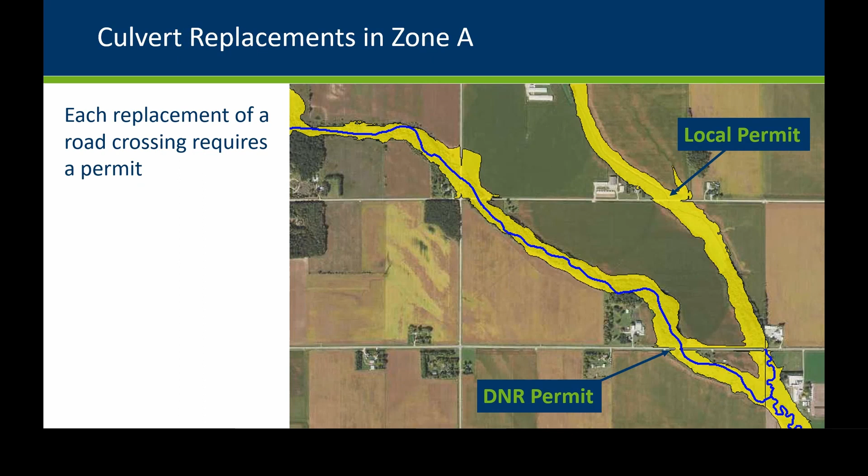So visually, we see that this is a floodplain, and our blue line is a public water, and the polygon is the mapped floodplain. We have a culvert going over here, and this obviously requires a DNR permit in this situation. Then we have a culvert going under the road here, and a DNR permit wouldn't be required in this situation because it's not a public water, but a local permit is required.

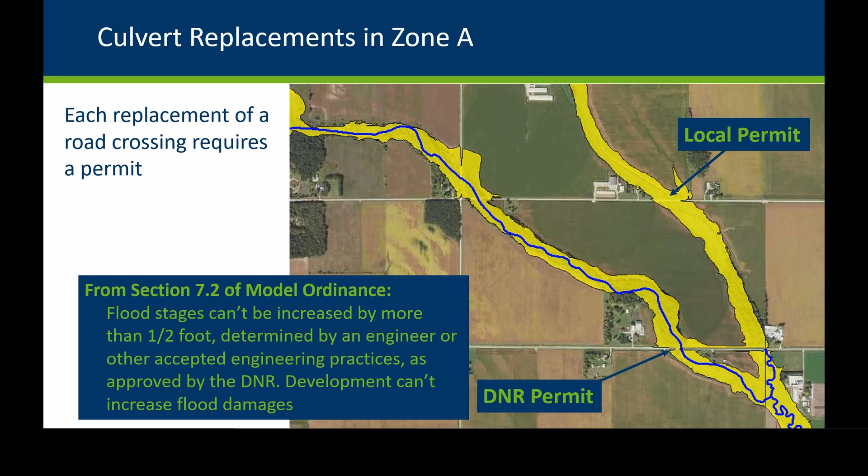Another plug for our floodplain culverts: if you're going to talk culverts, it's a good time to consider floodplain culverts. If you're replacing a culvert, there was probably something wrong with your original culvert, so this is an opportunity to consider enhancements. We've been pitching floodplain culverts to stabilize streams for water quality, and there's a process for it.